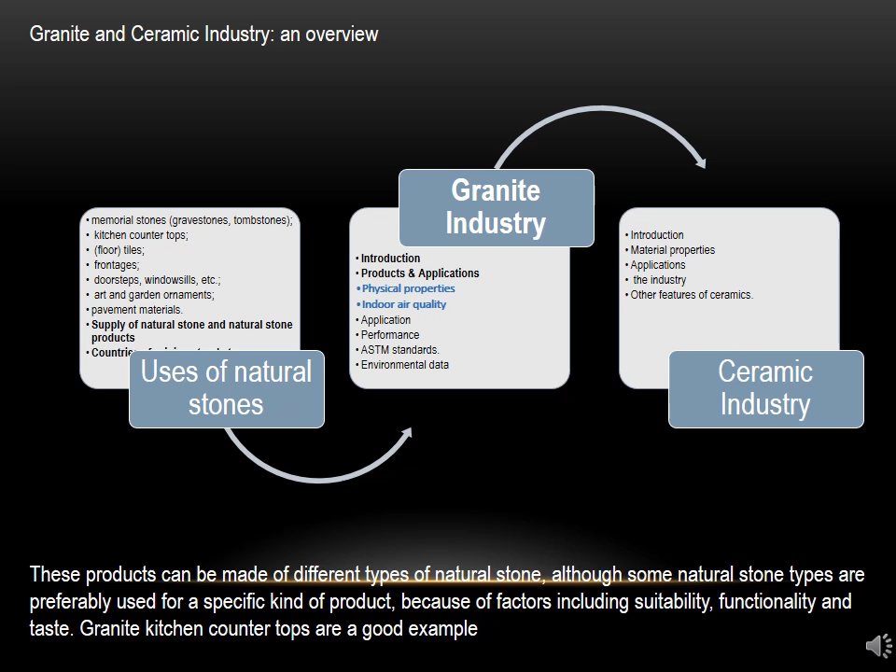In terms of quantity, China now extracts twice as much natural stones as the European market. Overview of granite industry in the next slide. The common dimensional characteristics of this quarried stone depend upon the attribute of the deposit from which the stone was extracted.

The properties of granite are measured along the metrics of density, hardness, porosity and aesthetics. It is not a pollutant, but the adhesives which can be used to join granite can be a pollutant. The applications we have already listed out here.

Performance is measured along two broad dimensions of durability and reuse and recyclability. There are ASTM standards which are for better sampling and selection and give information about material characteristics and physical requirements. The environmental data for quarrying and processing are provided in here.

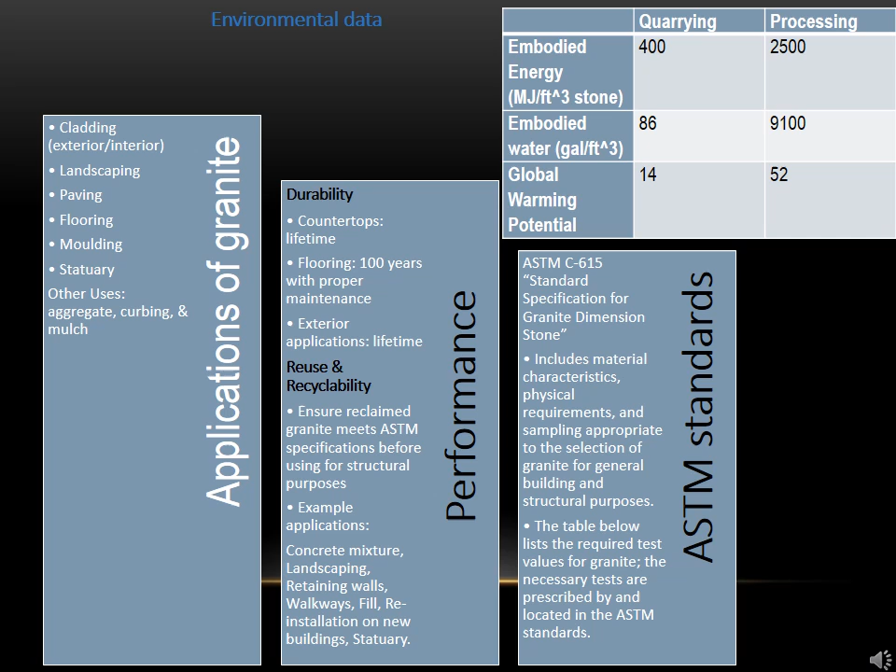Next slide, giving you an overview of ceramic industry. Ceramics, as we know, are produced by fusing raw material substances via baking in a kiln. The most notable properties of ceramic are excellent electrical and thermal insulation, and good retention properties at high temperature.

Based on the composition of ceramics, they are classified as oxides, carbides and nitrides. Based on their application, they are also classified as engineering ceramics, construction ceramics, pottery, glass, and glass has further classification. In India, the ceramic industry is 100 years old. Ceramic producers are manufacturers both large and small enterprises with wide variance in type and size.

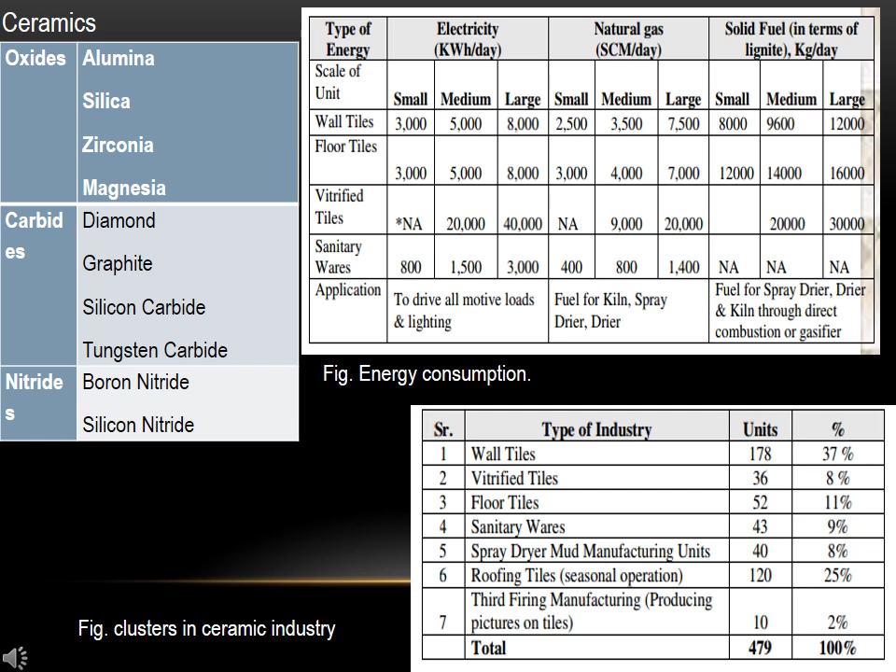The next slides about current sustainability practices and trends in the industry will be taken forward by my colleague. Now coming to the current sustainability practices and trends followed in the industry, we'll first look at the granite industry.

The ANSI NSC 373 standard establishes well-defined metrics for environmental, economic and social responsibilities followed by the company. It evaluates the organizations on 9 facets: water usage and recycling, custody and transportation, site and plant management...

...land reclamation and adaptive use, corporate governance and energy usage and conservation, management of excess processed materials and waste, safer chemical and materials management, and lastly human and health considerations. After evaluating the organization on the above basis, it certifies the organization as one of the following: bronze, silver, gold and platinum.

Now the next trend followed by the industry is waste management. It is a 3-part process, whereby the first part is producing less waste. This is ensured through quarry reconnaissance, fines and screenings, and scrap stone management. The second part is exploiting the value of waste, and the third part is managing waste properly.

The above two mentioned parts have strategies to reuse, recycle, compost, sell, create new products, or otherwise prevent waste from being landfilled or incinerated, or follow regulations for lawful disposal of wastes that cannot be given a second life.

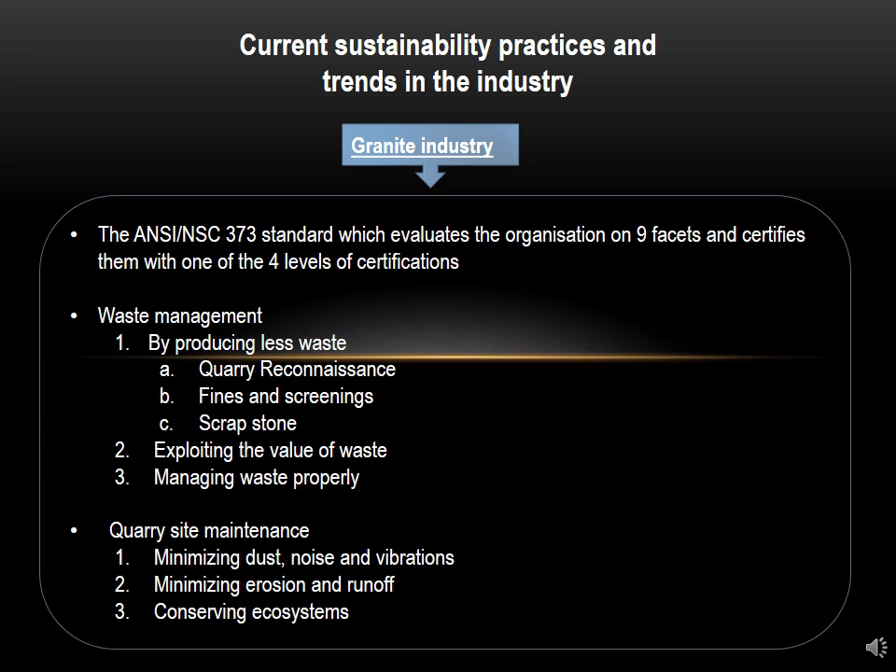Now, coming to the next trend, that is quarry site maintenance. Companies are achieving quarry site maintenance in two ways: minimizing dust, noise, and vibrations produced at the site, and secondly, by land maintenance and ecosystem conservation, done by site cleanliness and organization maintained at the site, minimizing erosion and runoff, and lastly, respecting and conserving the ecosystem.

The second one is the ceramic industry. Now, in this industry, there are currently many eco-design strategies followed all over the world. Firstly, selection of low-impact materials. This is done by incorporating waste material in the ceramic development processes.

Some tile manufacturing companies recycle pre-consumer waste, reaching up to 90% recycled material by weight, while retaining the strength and versatility of the original product. There are also examples of houseware and tile producers that manufacture items using the sludge from water treatment plants.

The second strategy is reduction of material used. This is done by reducing the product thickness. Some wall and floor tile companies have researched into the raw materials and have achieved reduced thickness of their products from 12 mm to around 4 mm.

The third one is selection of environmentally sound production techniques. This is done by reducing kiln firing operations. The ceramic industry has invested significantly in more eco-efficient production techniques. Designers can now influence the environmental performance of the manufacturing processes.

For example, designing products whose production requires fewer firing steps or lower temperatures.

The next one is optimizing packaging and distribution. This is achieved through reducing packaging for the products. Companies have been engaged in reducing the amount of cardboard, shrink plastic and glue, and eliminating strips in packaging. This is also achieved by eliminating distribution activities, such as a recent trend called picking, a new form of direct sales orders from the end consumer to the manufacturer, thus reducing transport impacts.

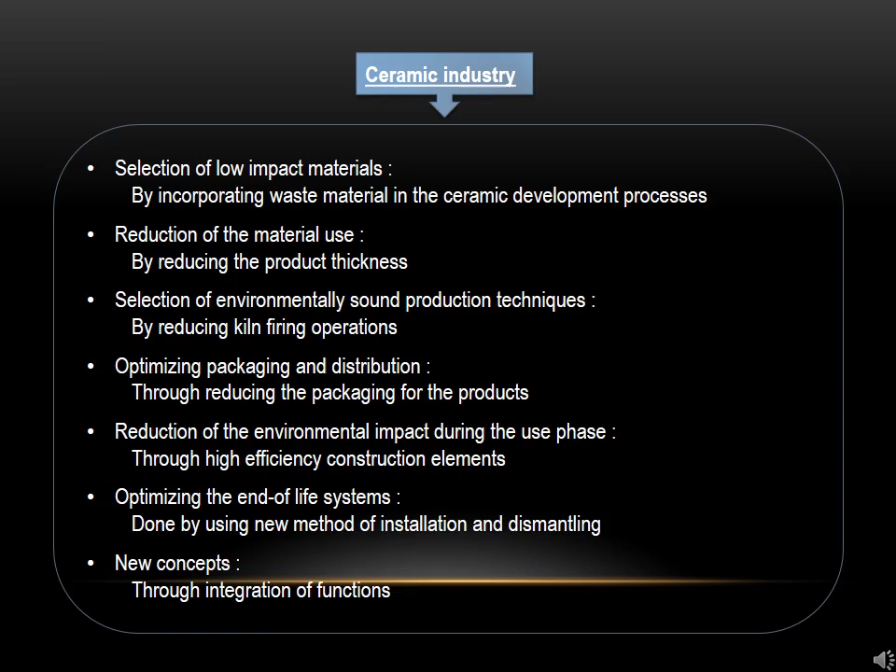Moving on to granite regulations. Certain countries have developed specific standards for classifying granite and its use. Taking an example of China, because of the alarming surge in granite use in homes, China sponsored studies for studying the health aspects of granite. They specifically focused on radiation issues and radon gas exhalation rates. After the studies, China started regulating granite and divided it into 4 levels, and only the safest level was allowed in Chinese dwellings.

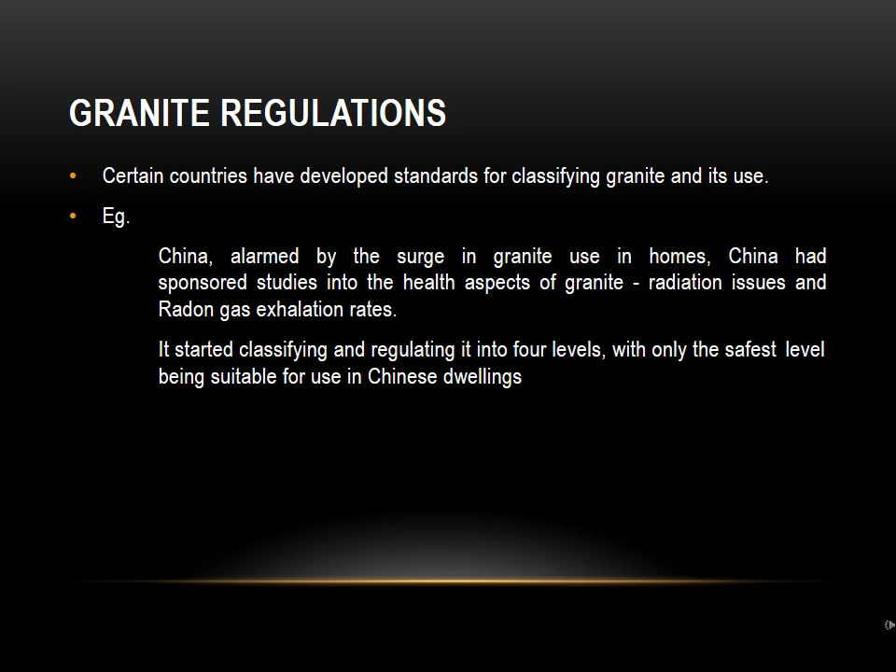The ceramic industry has been regulated in certain parts of the world, specifically the European Union, in respect to sustainability. In the EU, the industry falls within the scope of the Directive on Emission Trading and Industrial Emissions, and specifically REACH, which stands for Registration, Evaluation, Authorization, and Restriction of Chemicals. Under the same, the producer has to specifically file a written declaration that the goods in the market comply with the lead and cadmium release limits.

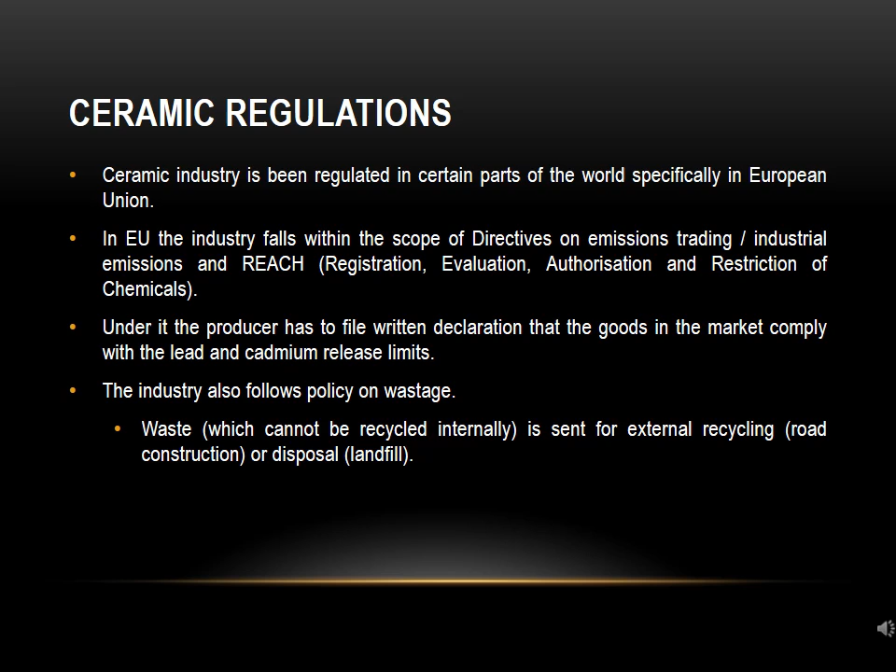They also follow a specific policy on wastage. The wastage, which cannot be recycled internally, is sent for external recycling and will be used in road construction, or disposal, that is landfilling. The granite industry of India contains 100 manufacturing and 43 processing units.

It grows at the rate of 10% per annum. The methods used are largely manual or semi-mechanical. The ceramic industry grows at the rate of 15%. India is the third largest ceramic tile producer, with 6.65% contribution to the world market. The number of ambitious programs launched in the last 2 years by the Union government, like Smart Cities Mission and Housing for All by 2022, will act as a big push in demand for the ceramic industry in India in the years to come.

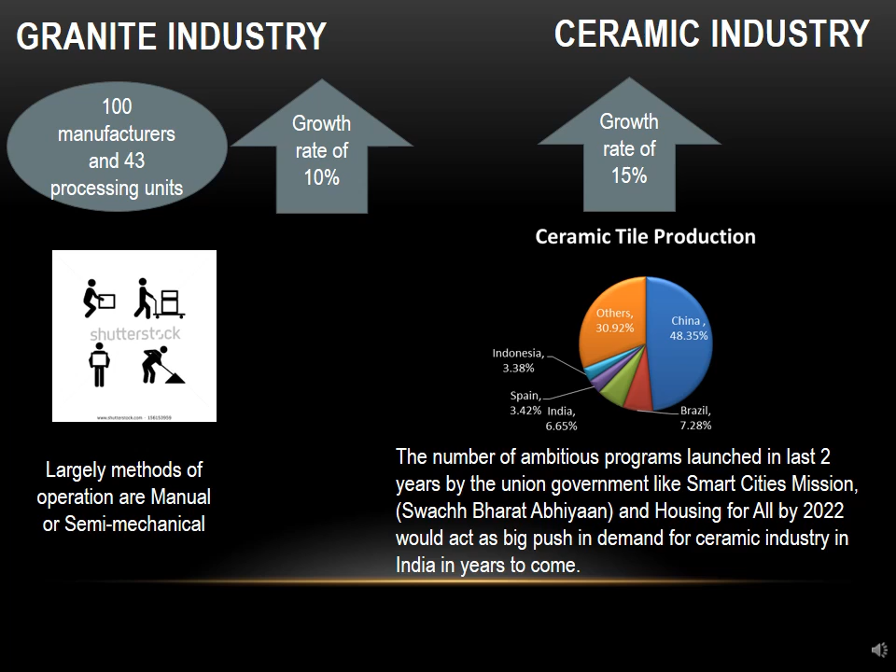Sustainability issues in India are: child labor is pretty rampant, with gender discrimination, women are not equally paid as men. The working conditions are hazardous and there are insufficient safety measures and long working hours. The current methodology of quarrying causes extensive use of water and energy resources. There is illegal quarrying leading to destruction of environment. There is irresponsible waste disposal damaging agricultural areas, and dust pollution caused damages the local air quality.

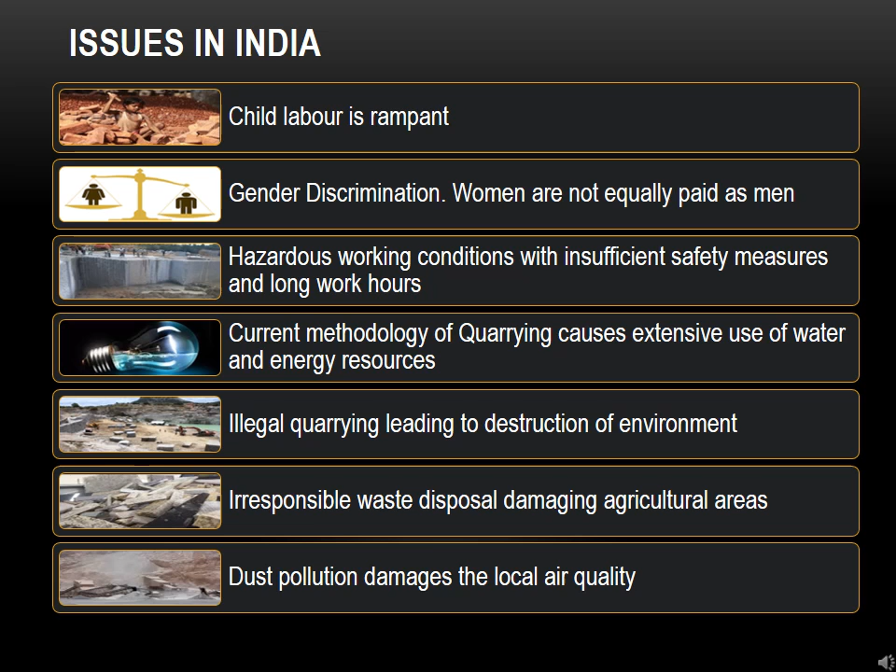These are some examples of sustainability practices by Indian companies. Hindware commissioned an R&D center recognized by the Department of Science and Technology, Ministry of Science, Government of India for more than 30 years, the first such instance in the industry. They rationalized the consumption of water per flush in their products from 15 liters in 1962 to 10 liters in 1984 and 6 by 3 liters in 2004, a potential saving of 35,000 liters per annum across a family of 4. They also launched the European Water Closet (EWC), which consumes only 3.5 liters of water per flush.

Another company, Kajaria, has taken membership of the Green Building Council, reassuring customers and stakeholders that each product has been created in an eco-friendly process. CERA is another company which has launched its range of green products with an aim of saving 34% of water. It is also a member of the Green Building Council, and has adopted zero pollution production processes and raw materials for its newly commissioned faucet facility. CERA's sanitaryware plant uses natural gas as a green fuel.

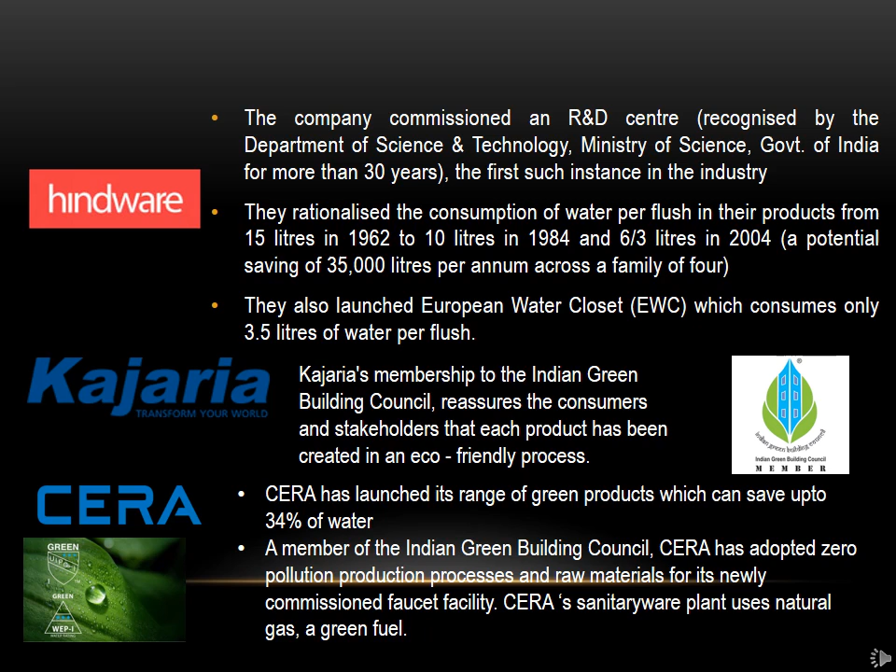The future sustainable practices which can be followed are: a continuous monitoring system by the government on sustainability practices; a periodic review of firms on sustainable practices and a roadmap to protecting the environment and resources; strict rules should be imposed on illegal mining, ensuring minimal environmental impact during licensing; and there should be joint corrective actions by industry leaders and government to minimize the sustainability impact.

Importing countries need to ensure stricter norms of sustainability practices in the value chain. Promoting usage of greener and eco-friendly certified products in the construction industry, including green building initiatives, can really boost sustainability. Making sure of recycling of products helps sustainability on a large scale. Use of better technology innovations like the roller kiln and tunnel kiln reduces energy consumption and thus helps in sustainability.